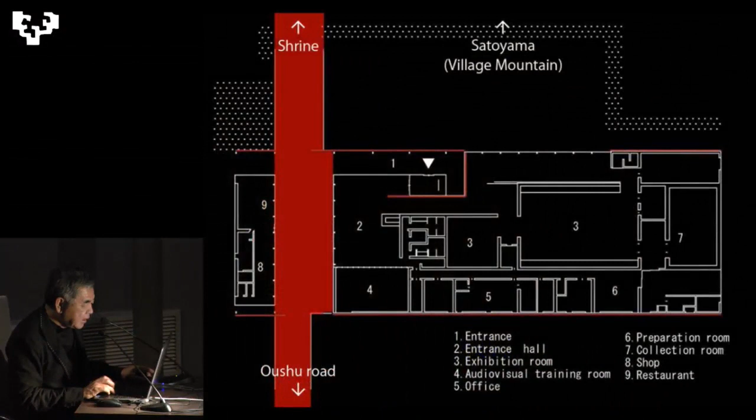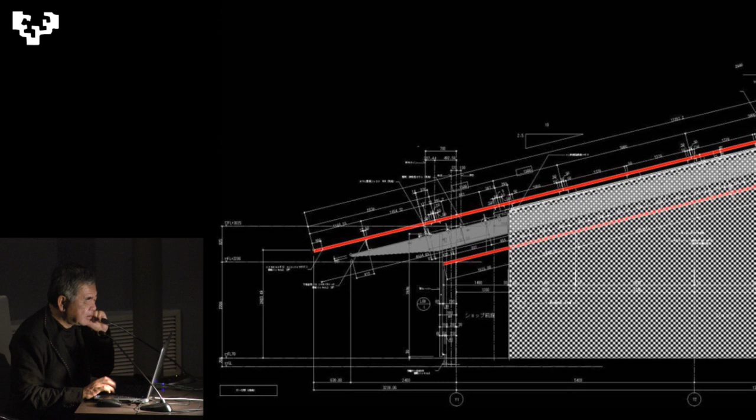I should go back to the building. This is the detail of the roof and wall. This is a big cantilever. The cantilever is very important for our building because it creates shadow, saves energy, and creates a peaceful space beneath the roof. This is a detail. And we have 2 layers of wooden lattice.

And this is the interior. Also for the interior, we used local material as much as possible: the stone from the quarry of the mountain, rice paper from the craftsmen of the village, and of course wood from the forest behind.

For interior, the most important concept is superjuxtaposition of layers. The screen is not solid. It is a typical method in traditional Japanese buildings. We hated the thick wall, we didn't have thick wall. So every wall is thin and sometimes movable, flexible, and transparent. The superjuxtaposition of those light layers was creating the flexibility of life. But in the 20th century, American concrete building came to Japan that destroyed the transparency of the space.

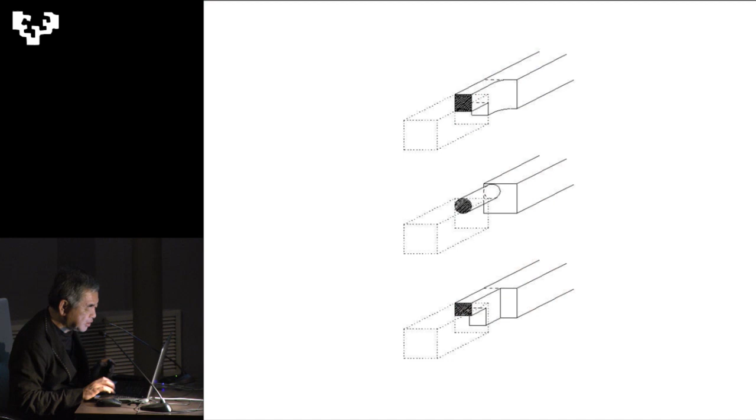Chidori is a unique joint, like that. Three different joineries were fixed like that, then twisted and finished. It's easy, and without any nail and without any metal, people fix those sticks together to create the pavilion.

We Japanese didn't use metal, because in the rainy weather the steel was very weak. It would deteriorate very fast, and people didn't trust the steel. We could produce metal, steel, but we didn't use metal for the building. This is the pavilion we built in Italy.

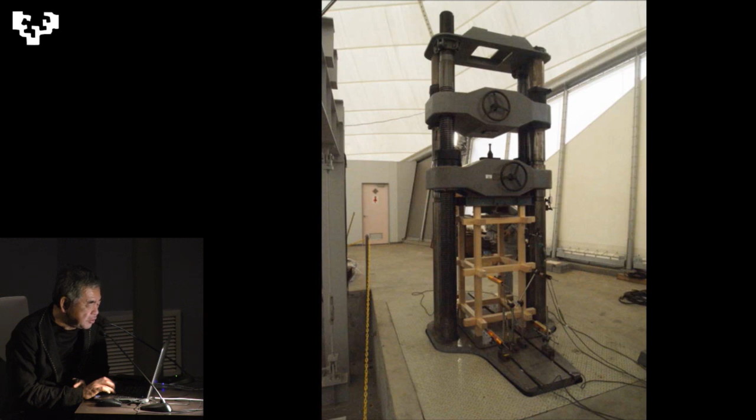No metal, no glue at all. We brought that idea to the permanent building in Japan. After coming back from Italy, we decided to use the same technique for permanent building. In Tokyo University, we worked with the engineer to test this structural system.

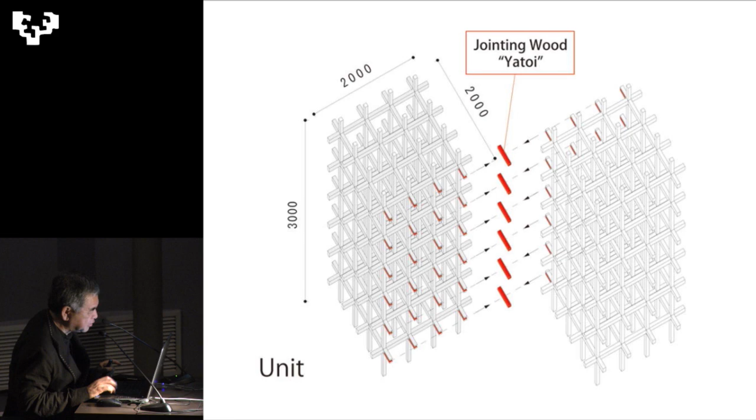And this is the dimension. Each grid has 50 centimeters between joints, and the sticks have a section of 6 by 6 centimeters. This is a section of the building. It's a 10 meter high building with those tiny sticks, no column and no wall.

The edge of the wood we often painted white. Originally we used a powder from clam, like seashell, but now to get powder from seashell is very difficult. Now instead we use a special paint to protect the edge of the wood from rain.

This is the interior, and this is the ceiling. The use of the building is a small museum, and we use each grid for the showcase. Normally the building and the furniture are separated, but instead we try to integrate furniture and building. The only element, these tiny sticks, can produce every space, can produce everything.

We call it a cell system. The cell of the human body can create anything, the same as a human cell, so we can use the sticks as the unit for every element of the building. This is the facade of the building, the entrance of the building.

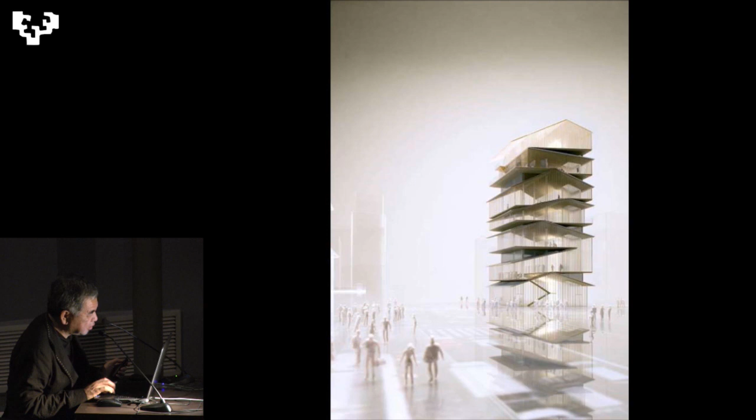And in the center of Tokyo, again, we try to use timber for the higher building, as in front of the temple. The old temple is a beautiful temple. That kind of temple sometimes has this kind of gallery, the small shops and restaurants. And in front of the main gate, we proposed to design that building. It's a 40-meter high building, 7 stories, but most of the material was wood.

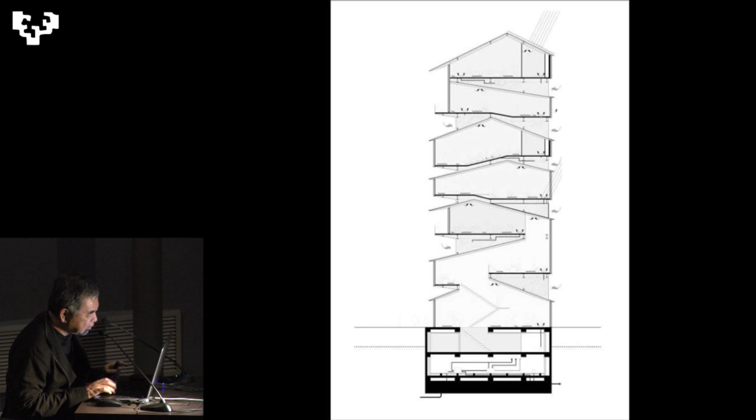It's a section. And in Japan, before the 19th century, as I mentioned, most buildings were 1-story or 2-story wooden buildings, and the people could feel the land. But now we've already separated from the ground, separated from the earth. For this building, so we try to use the same section for each floor, a one-story wooden building with a roof and terrace.

This is a rendering. This is a realization of the building. The facade, we did use wood, timber. But unfortunately, the main structure was steel.

It was built 7 years ago, and 7 years ago we couldn't use wood timber for the main structure of the building. But last year in Japan, the building code changed, and we could use CLT structure for the main part of the building. But 7 years ago we couldn't. So we did use wood for facade and interior, but not for the main structure.

Now we are working with CLT for some projects, so now we can use wood for the main structure of the building. It's a rooftop terrace, the facade.

And the next building, this is the highest tower in Tokyo, in Japan, 600 meters high, made by steel. But I think our building, 40 meters, is more important than the 600-meter building.

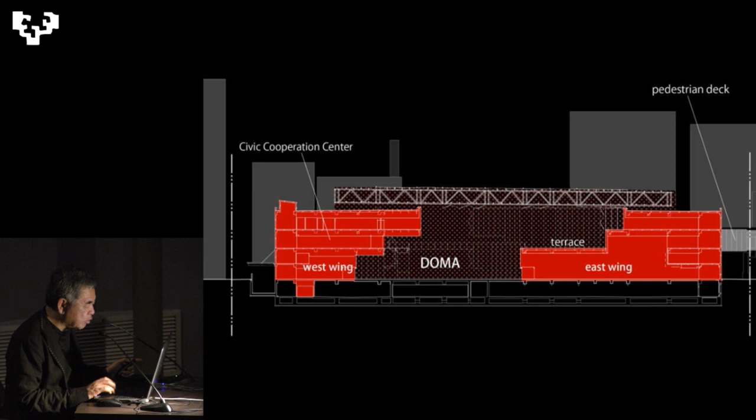And a city hall, for that kind of public project, we also try to use wood. The basic idea for this city hall is this space. At the beginning of the project, the mayor of the city asked us to design the plaza with the city hall. His idea is the plaza is very important for city hall, and I totally agreed with his idea. Public plaza is important for the community.

But instead of plaza, we propose the doma for the city hall. Do means earth, ma means space. Earth space was like that. In the farmer's house, people always had that kind of doma space. It's for working, and maybe in some European houses we can find that kind of idea.

It's for working and cooking and eating. It is between exterior and interior, and this is a very comfortable and very flexible space. Here we had a kitchen, here we had a working space, and the tatami space, the raised floor, was here. But most of the daily life happened in the doma space.

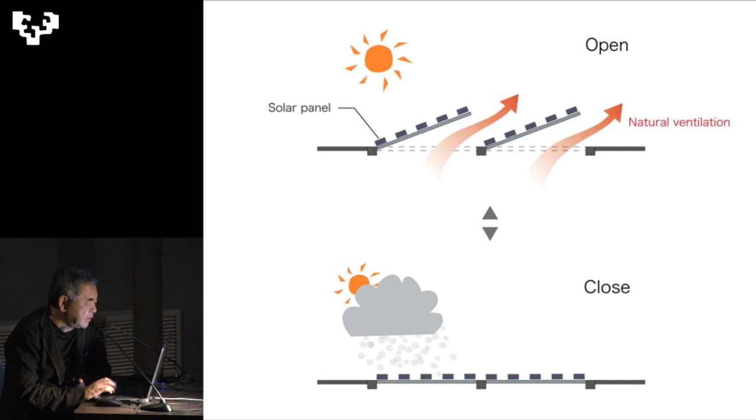And solar photovoltaic panels on the roof. As we combine those sustainable devices, but more than that, the materials are important.

The musician came here, and the local material again is this old lady producing rice paper from local trees. It is a very old method. And after making the papers, they put the paper in the snow. It is a very unique system.

That process makes paper whiter than usual. And we have this white paper on the wall and rammed earth on the floor. And this furniture we designed is made by rice paper, so we did a special treatment on the rice paper.

The brown color came from persimmon - persimmon, name of wood - so it's creating the beautiful brown color. And also on that paper we treated it with konjac potato. The konjac potato is a kind of potato, but it's very effective to protect rice paper.

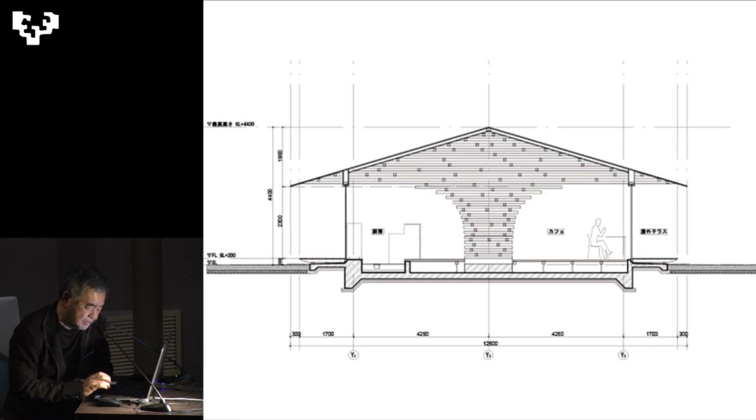The secret of this cantilever structure is carbon fiber. Carbon fiber is a contemporary technology - it's 7 times stronger than normal stainless wire, very light, very transparent, and we used the carbon fiber to suspend the edge of the cantilever.

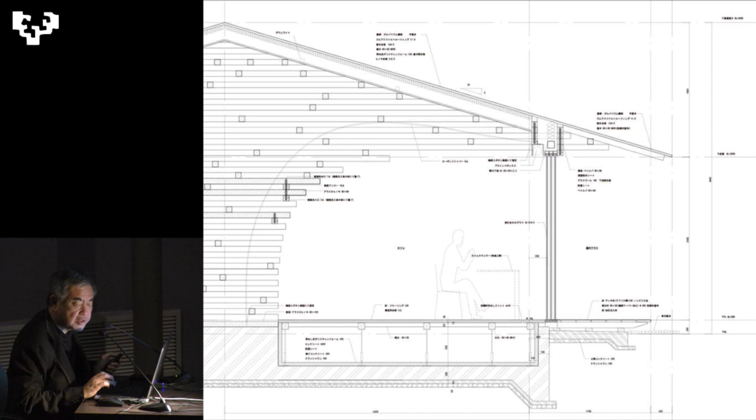Where is it? Maybe if you have a good eye you can find the white strings. I'm sorry, I will show this section of the building. These lines show the carbon fiber strings. Yes, you can find the white strings of carbon fiber here.

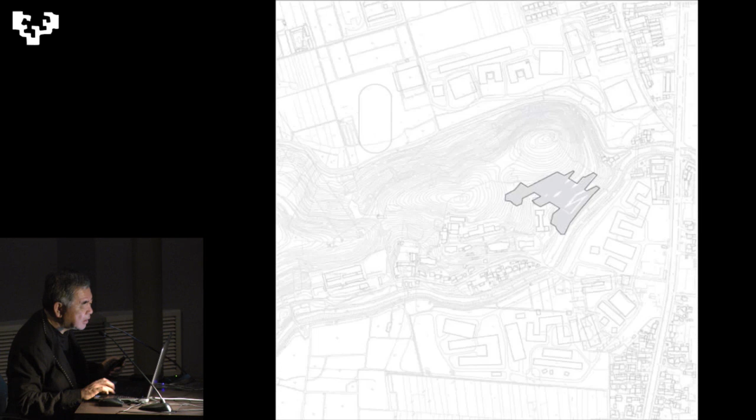And in China, we designed this as a museum for an arts university. The idea is a one-story museum following the topography. Following the topography creates the unique section of the building.

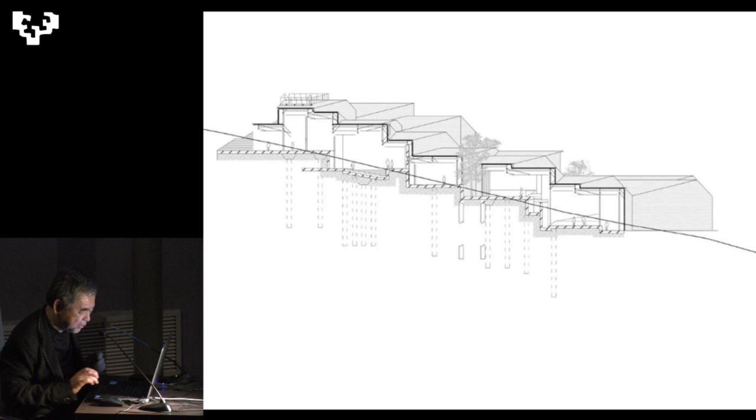Again, we try to use local ceramic tiles for the roof, and it's a recycled material. The ceramic roof tile in China is beautiful because it's handmade. In Japan, we don't have that kind of beautiful material, because in Japan the ceramic roof tiles were made by big factories, and big factories could not make this kind of diversity, this kind of roughness. But in China we could find that material.

And we tried to pick up the beauty of this material as much as possible for the roof and also for the screen. The screen of the building was also made by the same roof tile, using stainless wire for hanging the roof tile. In that sense, it's a combination of contemporary technology and traditional material.

The effect of the screen is like that - it can control natural light and create beautiful shadow in the building.

So the floor follows the landscape. Maybe you know the Guggenheim Museum in New York has sloping floors, but that slope is artificial. Here, the slope comes from the topography of the place.

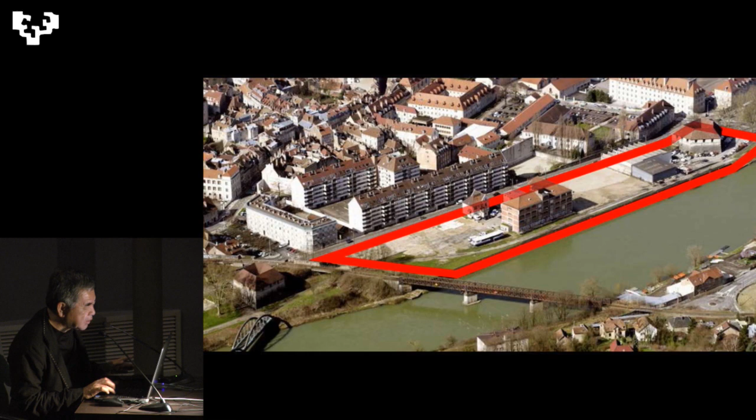In Europe, we also try to use local wood. This is the Besançon project in France, very close to Switzerland, close to the mountains. We tried to create a new combination with the old brick building - this is the old brick building, and this part is the new wooden structure.

In this case we used local larch for the building, combining the preserved old building with a new wooden structure and new wooden facade.

We did the landscape as well. This is a biotope - we try to invite birds and insects, and this is playing as a creek.

We also try to create this kind of in-between space. In Japan we love in-between space, so we call it Engawa space. Engawa space is between exterior and interior.

It is semi-covered space, but very comfortable. When I was a kid, my favorite space was always Engawa space. I was playing in Engawa space, the same as this space.

It's a semi-covered space, like that, combined with the biotope, and the light is screened by that kind of wooden roof.

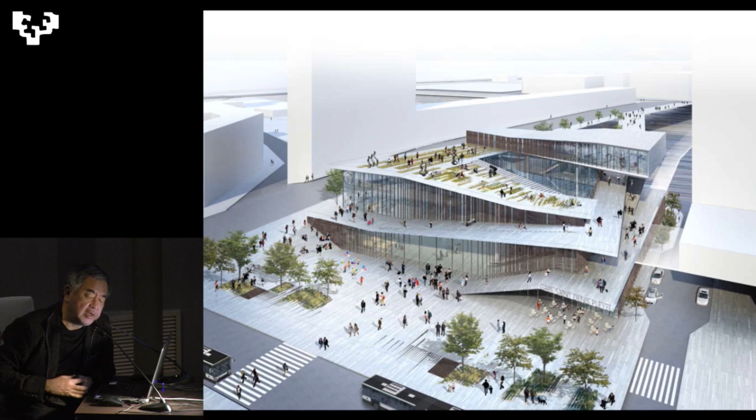For the Saint-Denis Pleyel Station in Paris - it's close to the football stadium, and Paris Saint-Germain, as you know a very strong football team, is close to that station. Four metros and four national railways meet at that station.

But this area in Paris is not a good area. There are many immigrants, and for security it is very, very bad. When I first visited the site, people advised me not to go out of the car - it's a very dangerous area in Paris, with many terrorists living there. You may remember the terrorism in Paris - those guys were living in that area, the Saint-Denis Pleyel area.

Our proposal is to bring nature into the station. The station used to be a very artificial box, but our station is open to the public, providing green space on the roof and using wood for the interior. Using wood for the station is not easy, especially in this kind of dangerous area - to use wood is very risky.

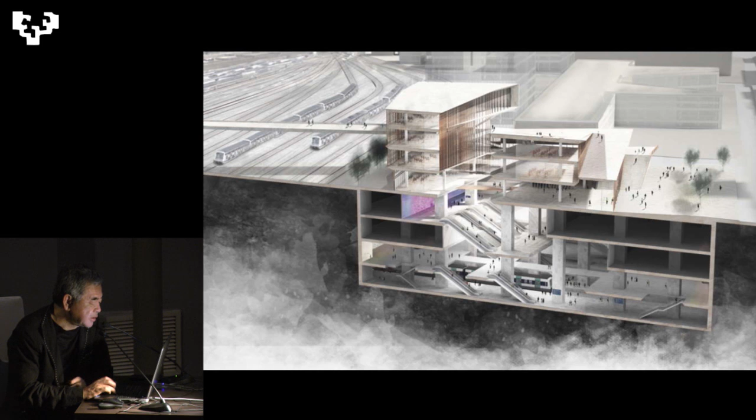The basement is a mix of stations, shopping centers, and a museum. There's another new episode for the station: we have a new art director, a very popular rap singer in France named Stromae. Do you know Stromae? We and Stromae are working together to bring videos on the wall and music to the station. This is a very unique combination.

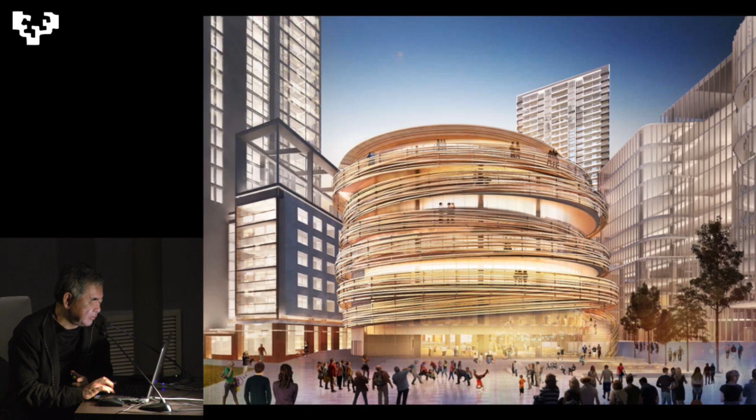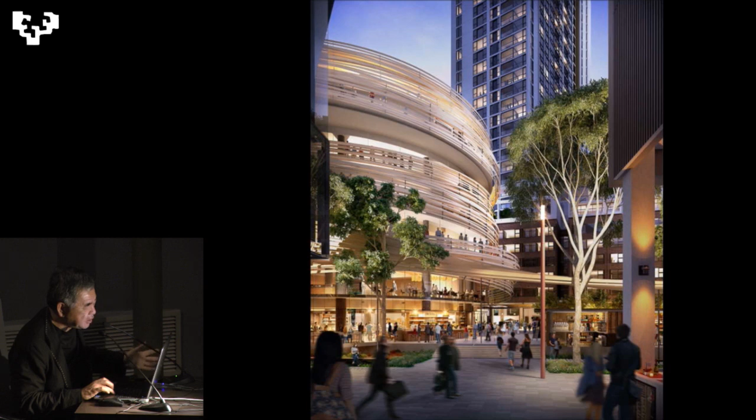And in Sydney, Australia, we also proposed to use wood for a community building. It's a mix of market, kindergarten, restaurant, and library - a very unique combination for the community. We proposed to use wood. This is very close to Chinatown, so the new nickname for the building is the ramen building. You know ramen, it's Japanese pasta, Chinese pasta - it's like that, and I love that nickname, ramen building. Instead of pasta, we used wood, and the detail was like that. It's almost completed.

And the National Stadium in Japan for the Tokyo Olympics 2020 is almost finished. We are proposing the wooden building. The main structure is steel, but the roof structure is a composite of wood and steel, and the facade of the building is wood.

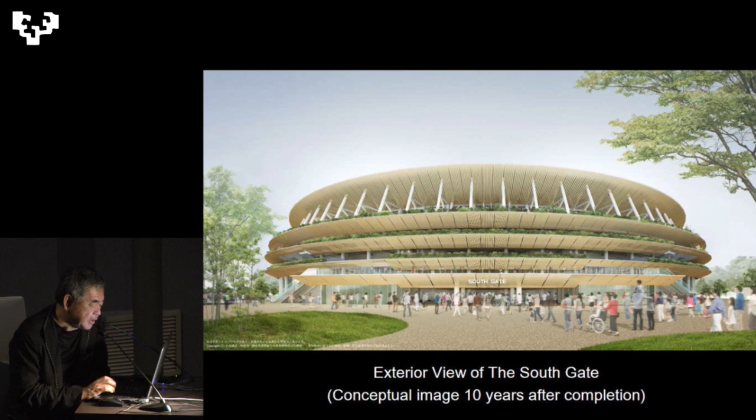In Asia, this kind of section was very popular. It is good for timbers, and also the small units of wood were replaceable. If one part was damaged, they can replace the wood.

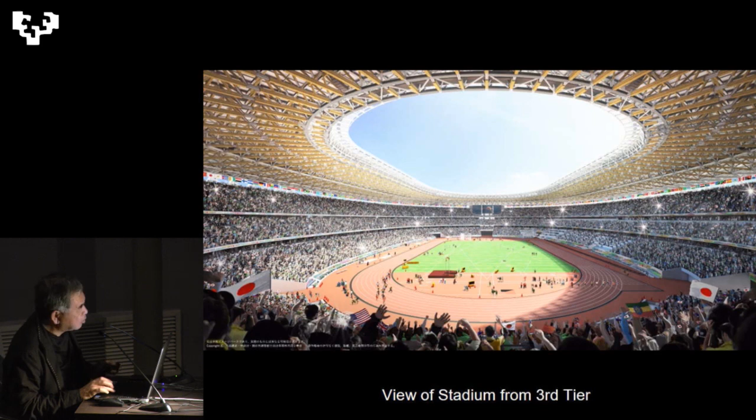As this shrine is very close to the stadium, we also found a unique system there. There is a roof structure of the building as a composite of steel and wood, and it shows a natural ventilation system using wood.

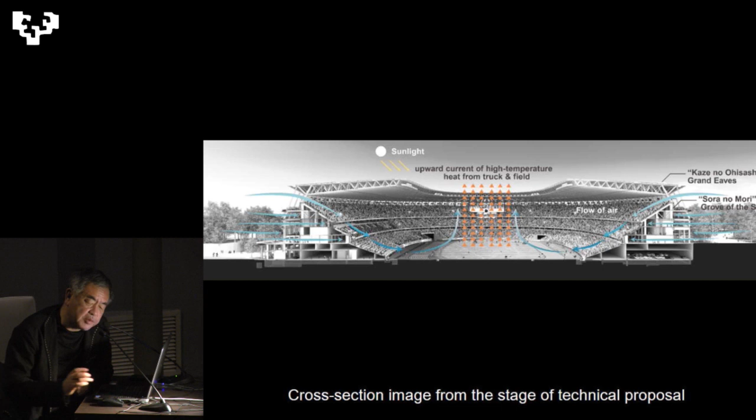It starts next year in July, which is the hottest season in Tokyo. Sometimes the temperature goes over 40 degrees, so we need a special ventilation system. Also, recycled material is used for the floor, and this is a skywalk that's open to the public.

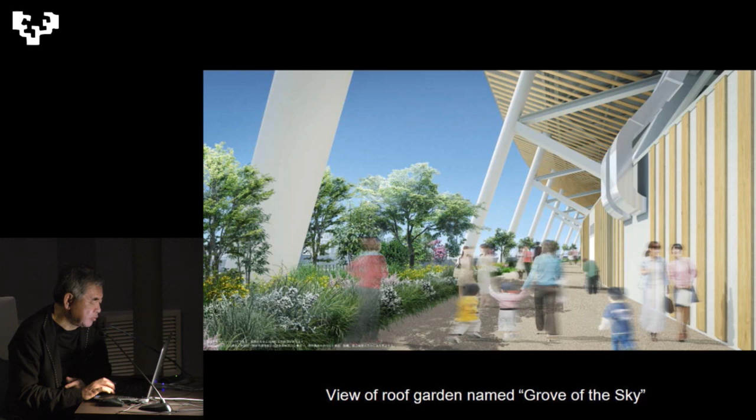And the stadium is not used for sports only. It's for the community, and people can use this walkway every day of the year. We also designed the creek beside the stadium.

And going back to something small, this is the smallest project we did. It's a wood block. We worked with musician Ryuichi Sakamoto—we've known each other for a long time. He organized an NPO named More Trees, and he's also worried about the situation of Japanese forests. He asked me to design a new wooden block.

The normal wooden block is like a brick, a kind of masonry wooden brick. But our idea is to create lightness, transparency, and combine it with specialist Japanese technique.

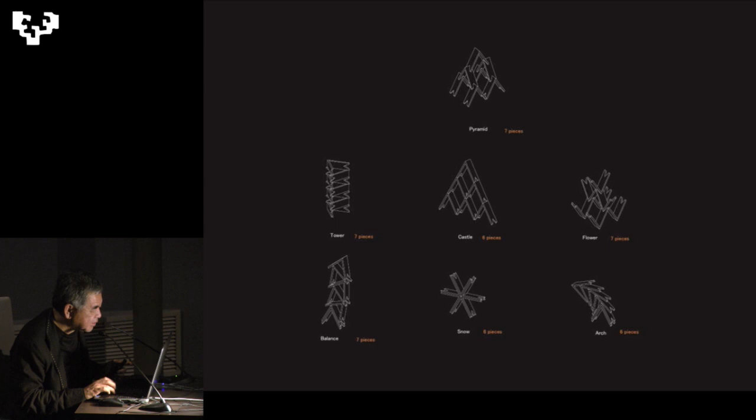This is a very flexible system, and it shows the diversity of shape. We can even make a special Christmas tree by using that element.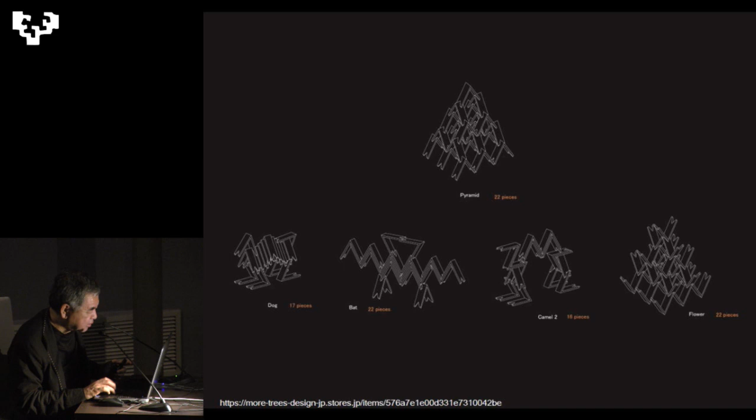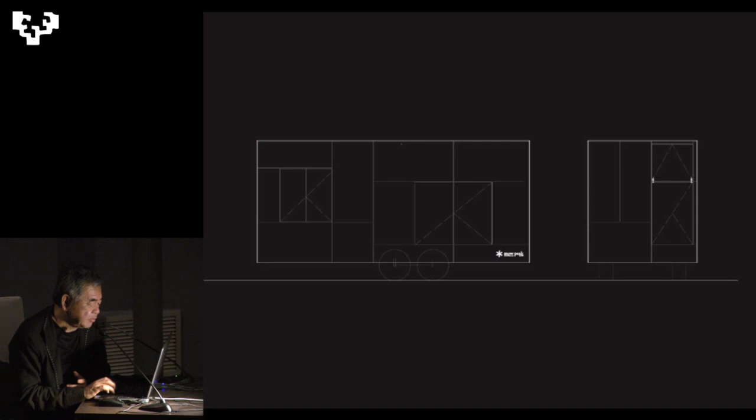Finally, I want to show the mid-sized project. It's a wooden trailer house. The normal trailer house was a product of 20th century America, a combination of steel and aluminum, but instead we wanted to make it in a wooden box.

This is an openable table and counters. This is when it was closed, and it opens like that. The interior, size-wise, is small enough—2.4 meters by 6 meters. It's very small, but the interior was very comfortable, very different from an American trailer house.

We carried it through the streets of Tokyo and found a good spot to open a restaurant with this trailer house. This is my own project—I opened the restaurant myself using this trailer house.

This is the counter. Even in that small space, the wood can create comfortableness, and 12 people can sit in the wooden box. And here is the paella. It was a restaurant for 1 year. We already closed the restaurant, but people are still talking about the memory of that special restaurant. I think the comfortableness came from wood, and the peacefulness came from wood.